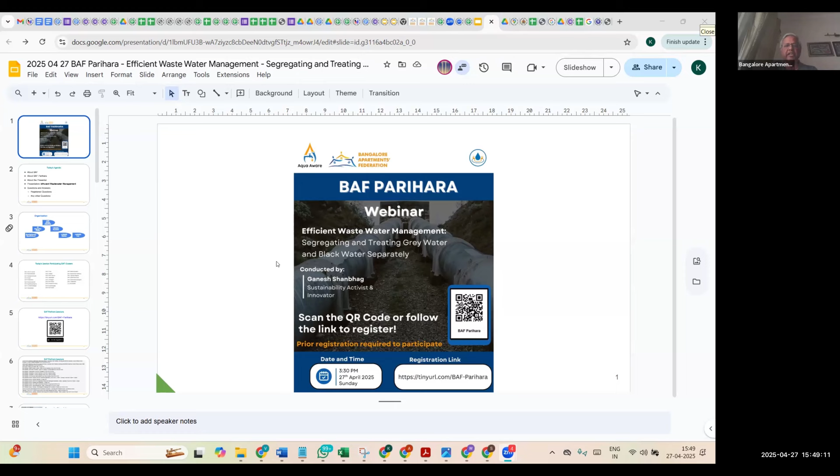Today's session is on wastewater management specifically, how we can do a better job and be more efficient in terms of treatment. And we have our expert speaker today, Ganesh Shanbhag.

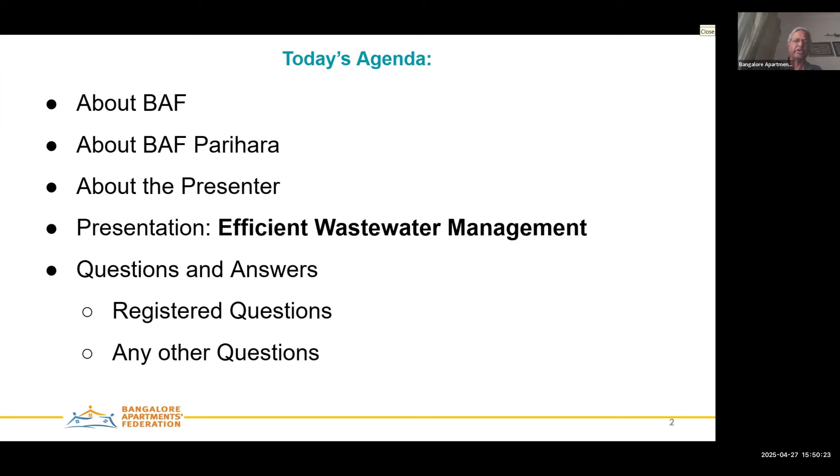We are structured with a governing council at the top hierarchy of the organization, then we have an executive council, and the entire cluster council representing the 30 geographical clusters.

Today's session is being attended by 20 representatives of 22 clusters.

We host a series of programs of interest to apartment communities, specifically managing committee members, and these are all hosted under a series called BAF Parihara. Parihara, as you may be aware, means solution. So today's session is one among them, and we've conducted numerous sessions on a variety of topics.

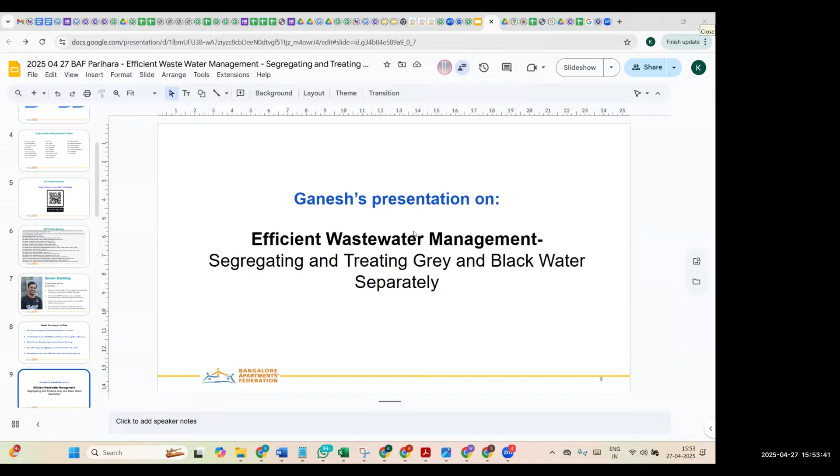So let me make you co-host. Am I audible to everyone? You're audible, yeah, loud. Okay, so I'm just sharing my screen. I'll have to make you co-host. I'm doing that. You are co-host now. Yeah, I am sharing.

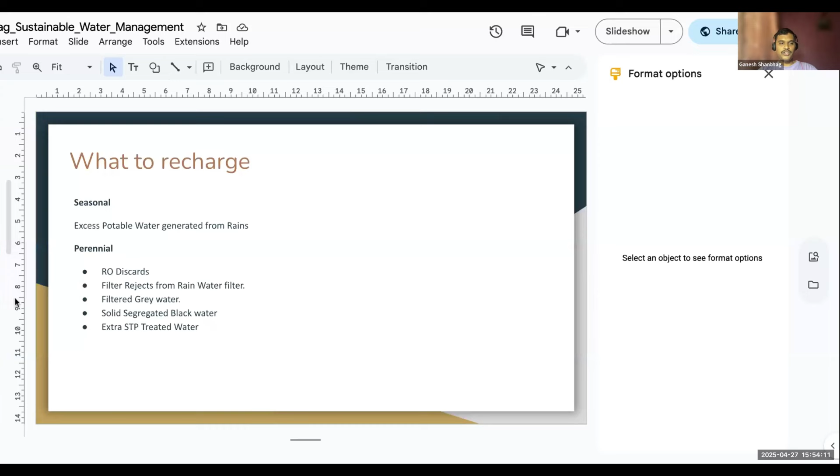So what I have done is I have made a consolidated slide now for both the sessions together, the rainwater harvesting part as well as the wastewater part, whatever I'm talking today. I will skip all the slides I have already covered and start directly into the wastewater part. We stopped here on recharge in the previous session, and now we'll start with the wastewater subject. Is my screen visible to everyone?

Yes, okay cool. So before we jump into the session, I just want to ask this question: is it wastewater, or is it wasted water? I'm pretty sure that those who have stayed in Bangalore for a very long time know that there was a river called Vrushabhavati, and it has a very beautiful meaning. Vrishab in Sanskrit means bull. The river which touches the feet of a big bull temple and flows is known as Vrushabhavati.

It was a very beautiful river, and right from the age of the Vijayanagara Empire, it is well documented how, under Kempegowda and others, trade flourished and agriculture flourished in the Vrushabhavati basin. Even today we celebrate Kadlekai Parishe, Avarekai Mela, and other such events. So Vrushabhavati was a very rich river, but today what have we made it? It is called Kengeri Nallah, right?

Kengeri Nallah is pitch black in color. It has no life in it. Absolutely no bird wants to drink that water. It is full of froth, and it's not a mistake of civilians alone.

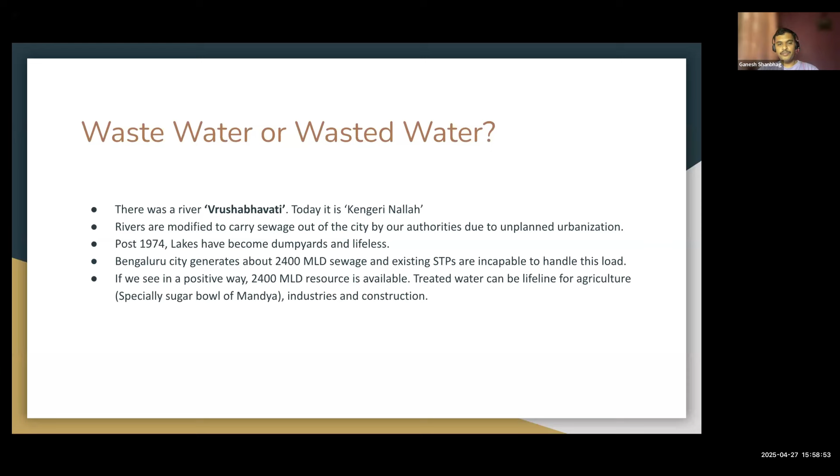All those green leafy vegetables mostly come from Chikkaballapur.

So let's talk about the problems with wastewater management. First, BWSSB's centralized sewage treatment plants are there only on paper. They are not working. If they were working, we never would have had nalas. So they are existing only on paper.

They say that they have like 68 or 70 STPs. They are planning to add another 60 STPs. Everything remains finally on paper. Nothing works. I don't know how to fix this, but at present it's not working.

And apartments are a different story altogether. People believe whatever STP installed by the builder is really great, but as soon as the builder hands it over to the RWA, it no longer works, because the builder would have done it in such a way that it's very cheap to install and very expensive to maintain.

SBR is the commonly used type of STP in Bangalore. SBR stands for sequential batch reactor. It's commonly used but very expensive to maintain. To give you an analogy, for a 1,000 flat apartment, it requires 2 lakh worth of power, about 70 to 80,000 worth of chlorine, two shifts of operators, and sludge removal every day. So it's very expensive to maintain.

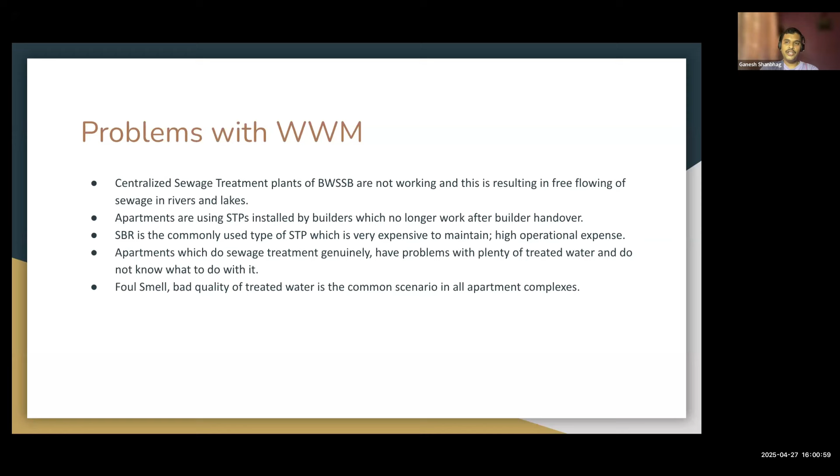There are a lot of apartments who actually do sewage treatment very genuinely, but the problem is they generate plenty of treated water and do not know what to do with it. So we'll address that concern as well today. This is the common scene across all the apartments: foul smell, bad quality of treated water, and a lot of other issues. Foul smell is at least the common issue across all the apartments where I have visited.

So I am working with something called a decentralized solution. What is a decentralized solution? It means you treat your sewage such that your kitchen waste, your grey water, and the water generating from flush are treated separately. By treating separately, you don't need sewage treatment, rather you need sewage filtering.

So whatever I am inspecting over here, on the skid, you can see there is a white color box which is a white color filter. This is called Aquatron, also known as a solid liquid separator, and it helps in treating black water independently. I have a video which follows, which will illustrate it better.

And this one in the center is a grey water filter, and grey water filters are readily available in the market. When grey water is passed into it, the soaps and detergents get separated, and clear water comes out of that filter. So now instead of treating the sewage, you are filtering the sewage, and everything is done without energy.

The SBR STP, the sequential batch reactor, is a power guzzler. As I told you, a 1,000 flat apartment would require about 2 lakh worth of power per month to run it. But this solution I am talking about is completely free from energy.

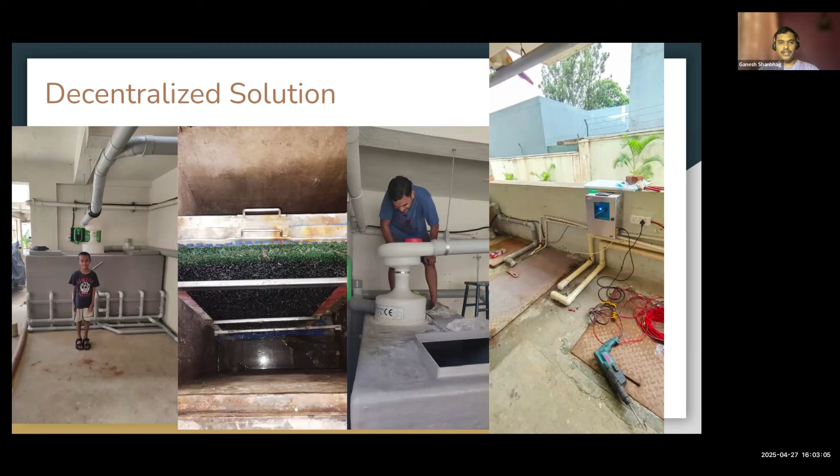And the last one we are seeing is disinfection which is done using ozone. I'll talk about it when we come to the video illustration in the next slide. Okay, so I'm just playing the video.

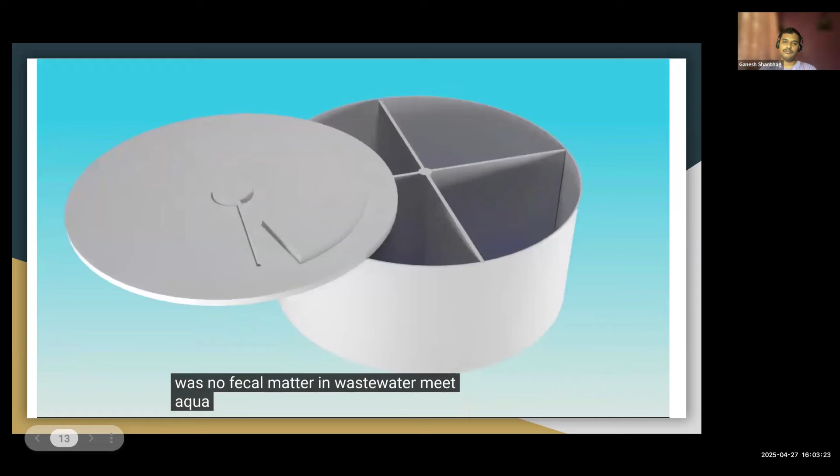Have you ever thought of how much easier wastewater treatment would be if there was no fecal matter in wastewater. Meet Aquatron, the solid liquid separator that removes feces from flushing water as soon as a toilet is flushed.

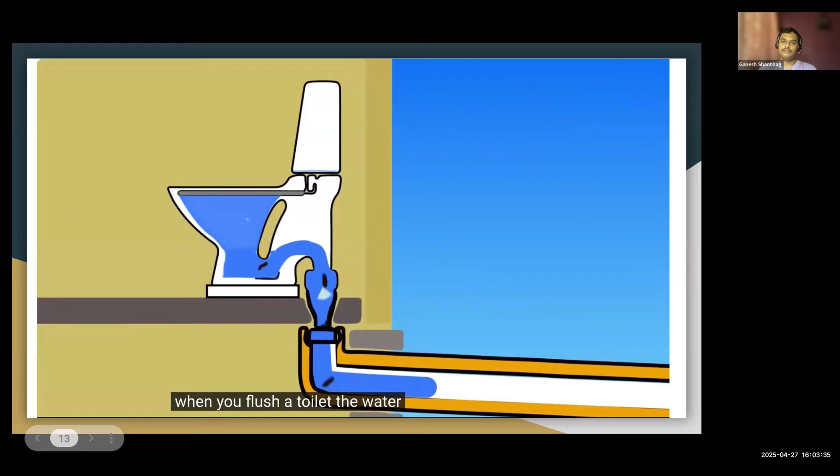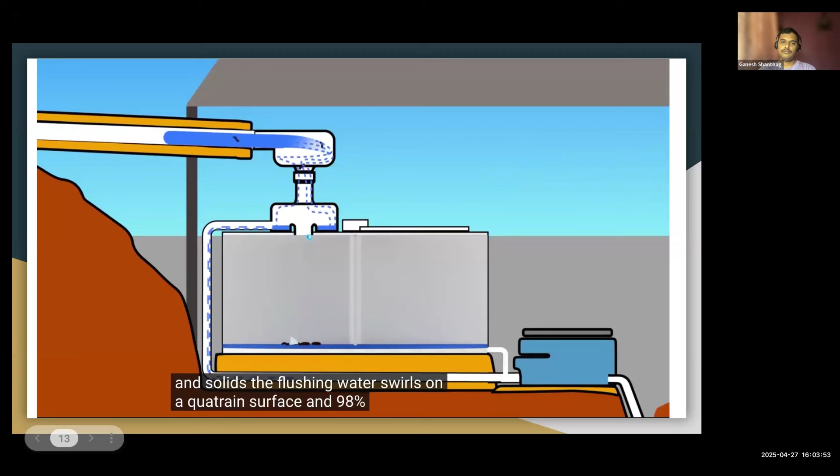When you flush a toilet, the water and solids travel towards Aquatron with good momentum, and once they enter Aquatron, centrifugal force and gravity step into action to separate the liquid and solids. The flushing water swirls on Aquatron's surface, and 98% of it is recovered without any solids. Fecal matter and paper fall straight down into the biochamber under Aquatron, together with 2% of the liquid.

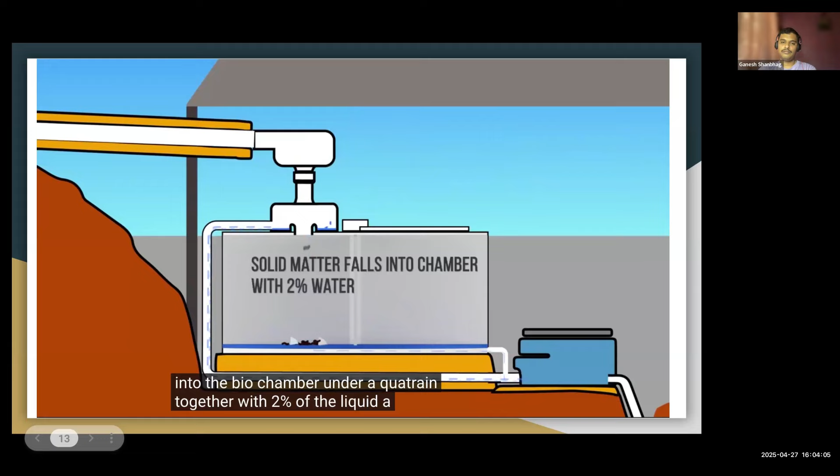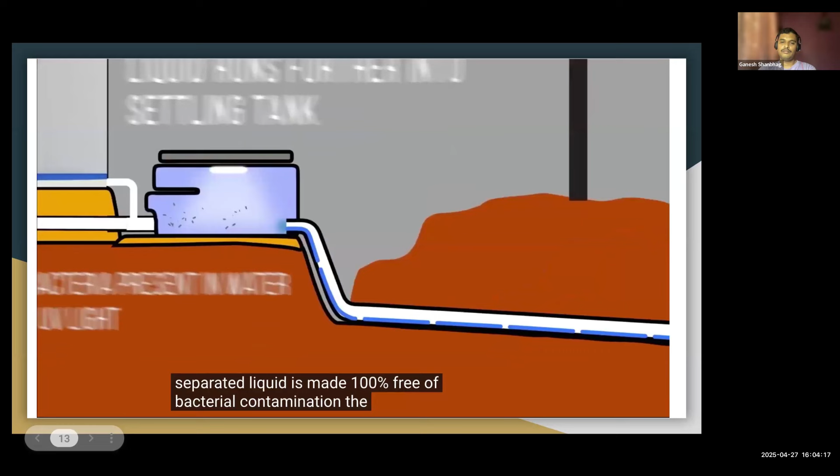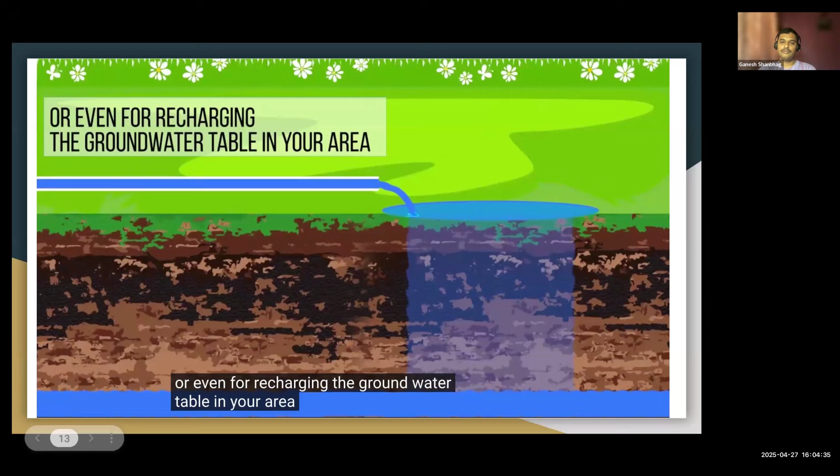A specially designed UV unit complements the system and makes sure that the separated liquid is made 100% free of bacterial contamination. The separated flushing water flows further into a settling tank, where its quality is improved by letting the suspended solids settle. The urine-enriched liquid is immediately ready for reuse in gardening or even for recharging the groundwater table in your area. In regard to the separated fecal matter, there is a multi-compartment biochamber for treating the solids in a most natural way.

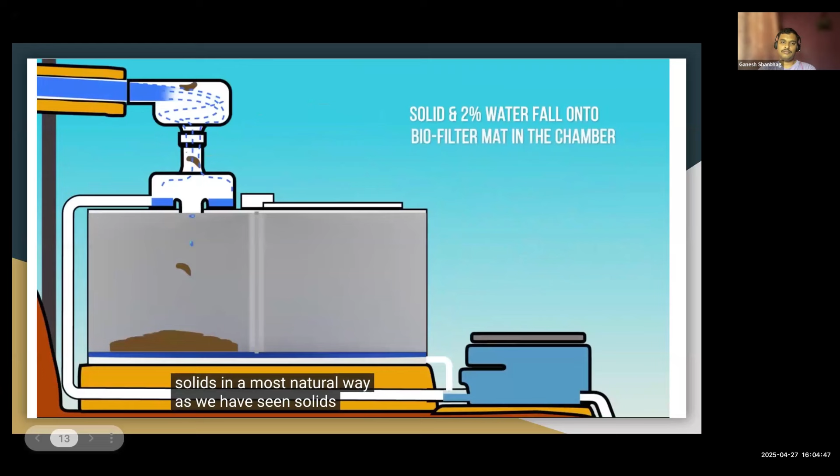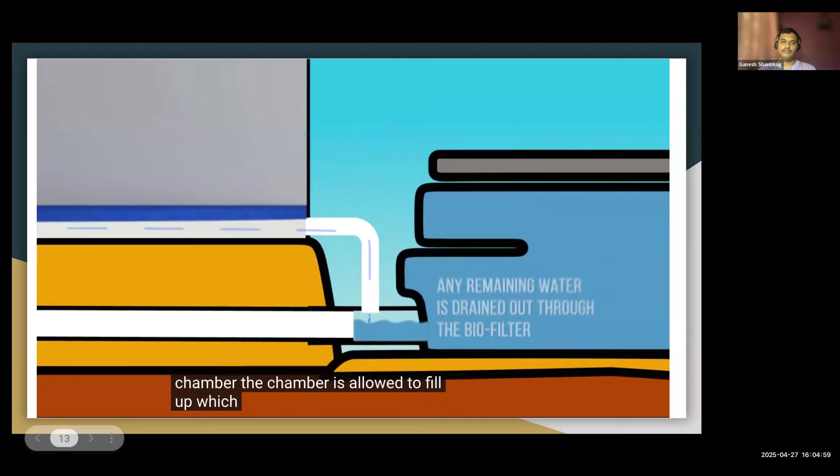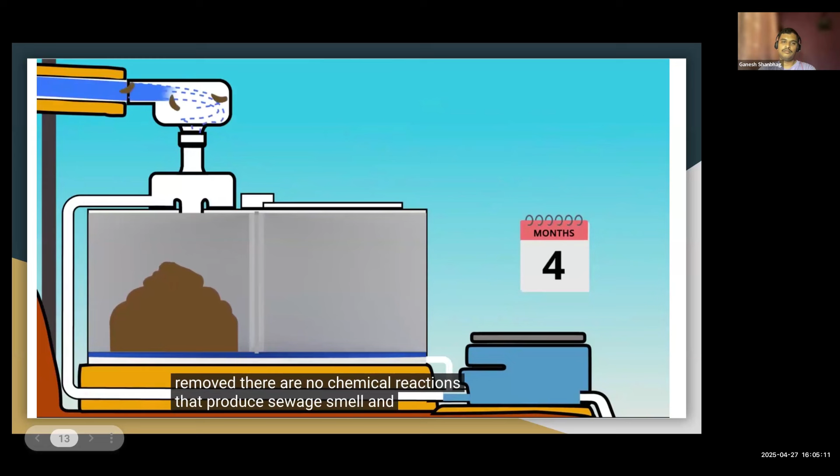As we have seen, solids fall onto the biofilter mat in the chamber, and the remaining 2% water is drained out through the mat on the bottom of the chamber. The chamber is allowed to fill up, which might take a few months depending on the chamber volume and frequency of use. Since liquids are removed, there are no chemical reactions that produce sewage smell, and the non-septic feces don't attract flies either.

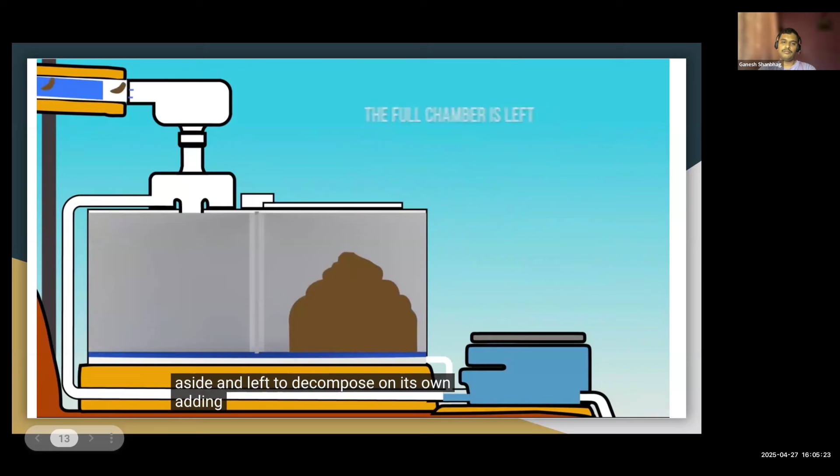Once a chamber is full, it is turned aside and left to decompose on its own. Adding some earthworms will make decomposition faster and more effective. Depending on weather and other conditions, decomposition might happen as fast as in a few weeks.

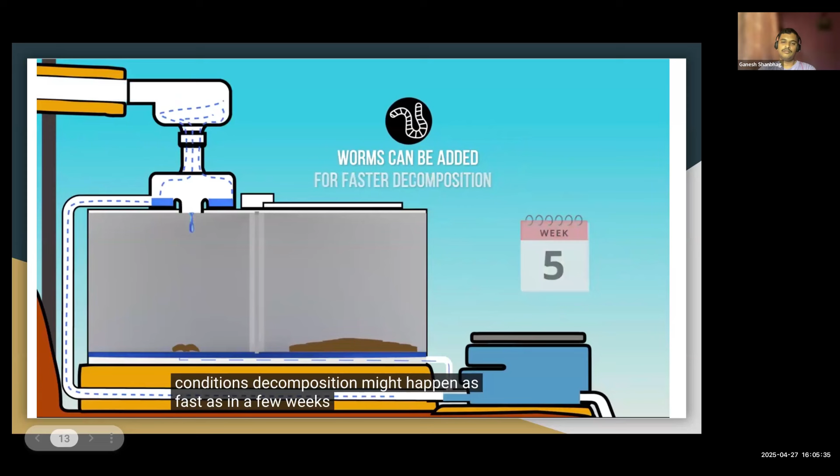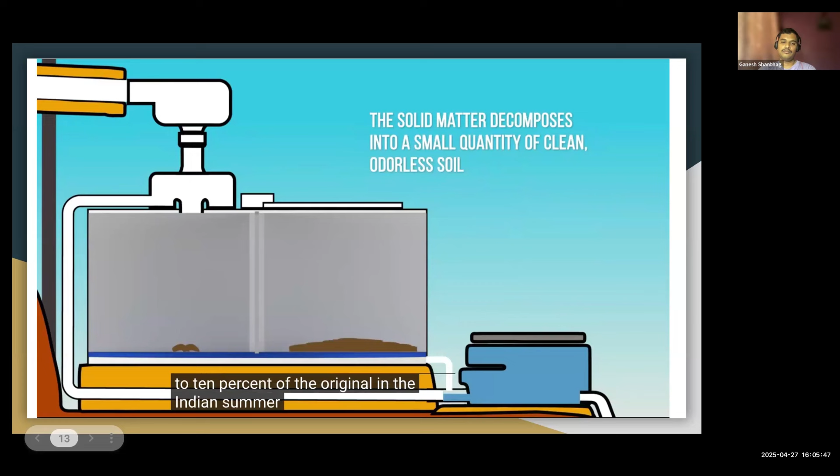Since the matter is turned into a gas, the final volume of composted fecal matter in the chamber will be about 5 to 10% of the original. In the Indian summertime, this process might happen as quickly as 2 weeks. The feces turn into a small quantity of hygienic, odorless soil which can be safely reused as manure.

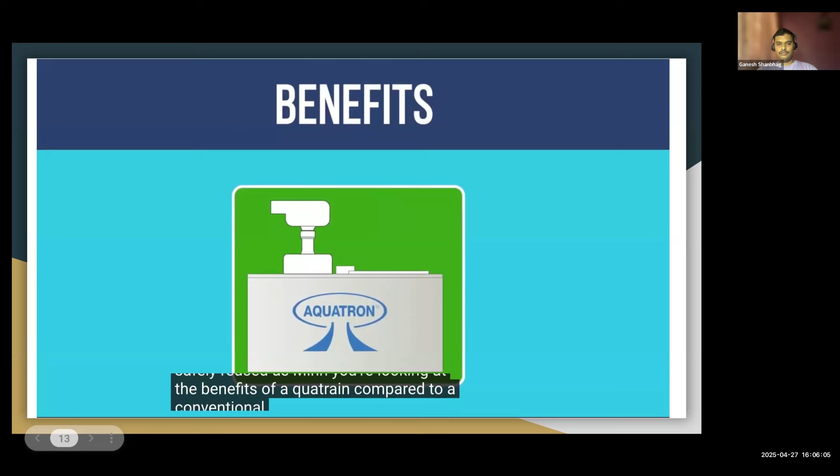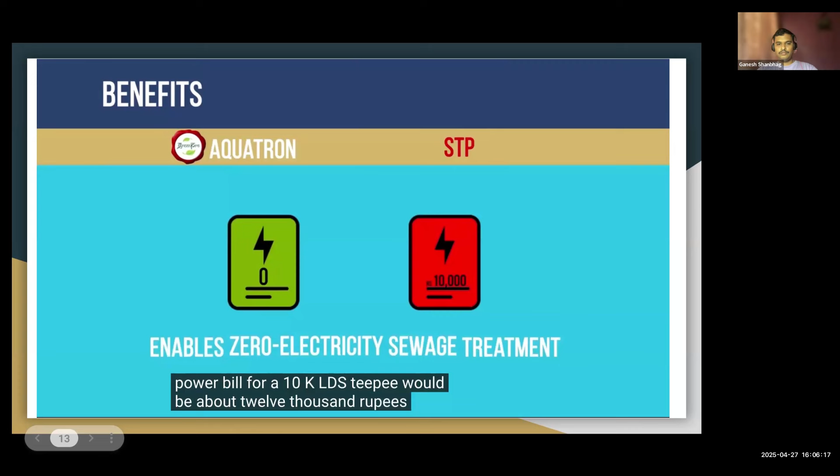Looking at the benefits of Aquatron compared to a conventional sewage treatment plant, the first thing is that there is no power consumption. For example, the monthly power bill for a 10 KLD STP would be about 10,000 rupees, but Aquatron runs without any power at all.

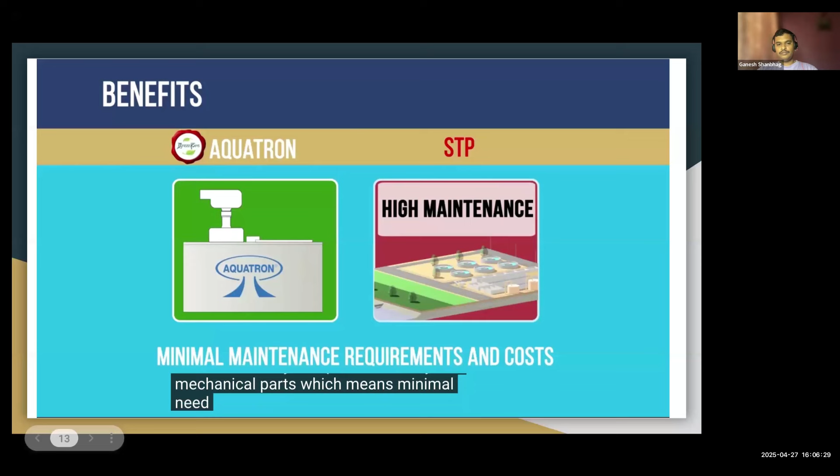The next thing is that Aquatron doesn't have any complex machinery and mechanical parts, which means minimal need for maintenance. There is also no need to purchase and use any consumables. Furthermore, there is no downtime for maintenance.

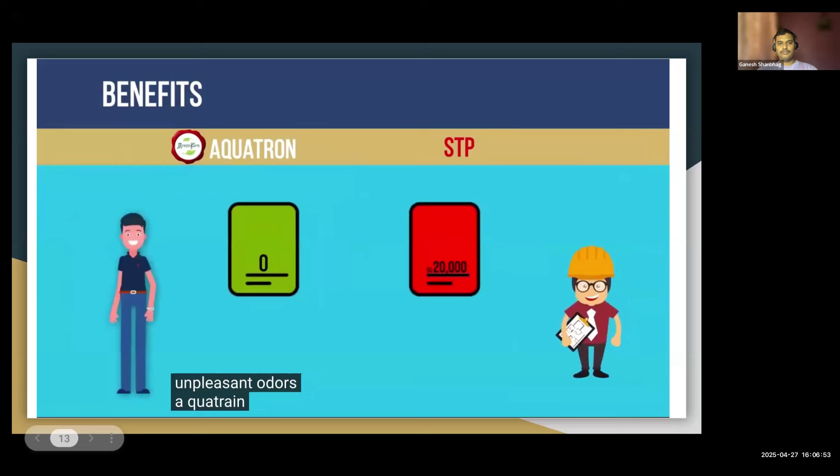As we already saw, an Aquatron biochamber doesn't smell, which allows placement of Aquatron in any location without the fear of unpleasant odors. Aquatron doesn't need a specially trained operator, and thus any operator charges are avoided.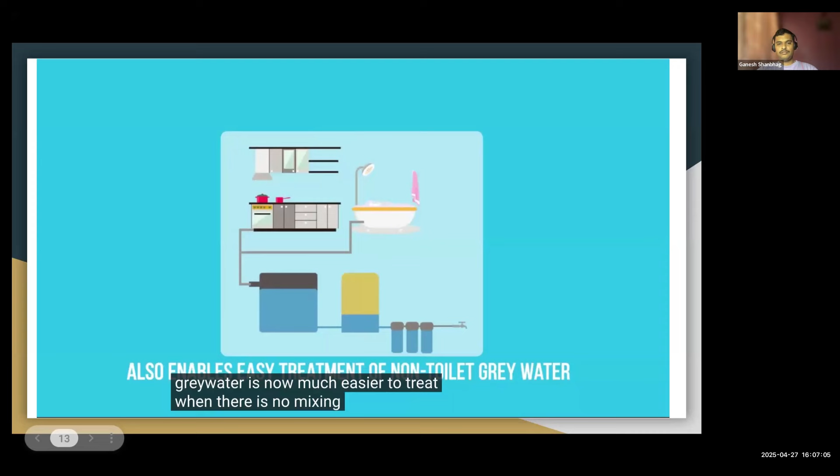Furthermore, grey water is now much easier to treat when there is no mixing with feces. Aquatron can be scaled up for any capacity. A single unit caters for up to 25 toilets, and you can keep adding units as per your requirement.

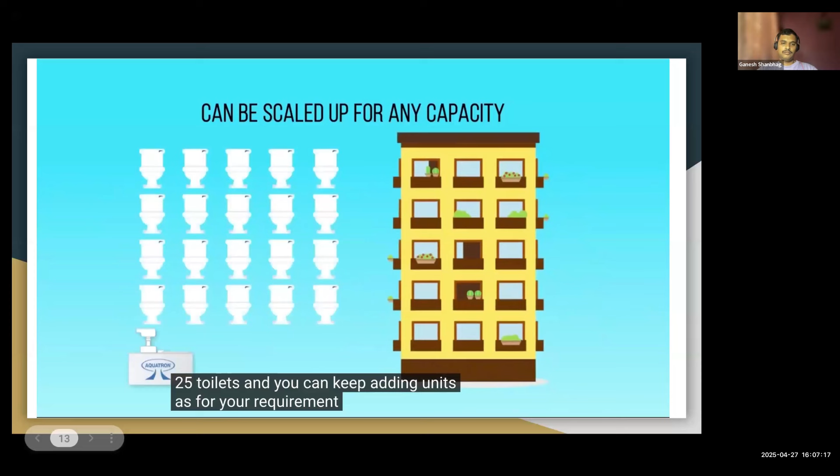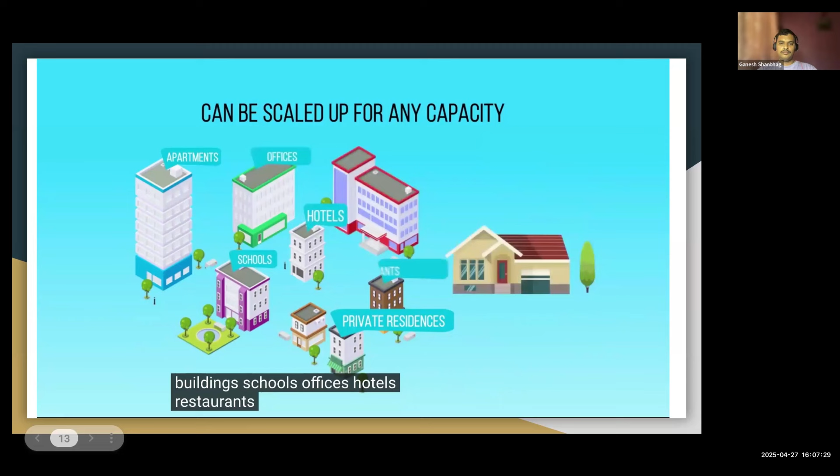Aquatron can be used in all types of buildings, from private residences to apartment buildings, schools, offices, hotels, restaurants, hospitals, cottages, farmhouses, and so on.

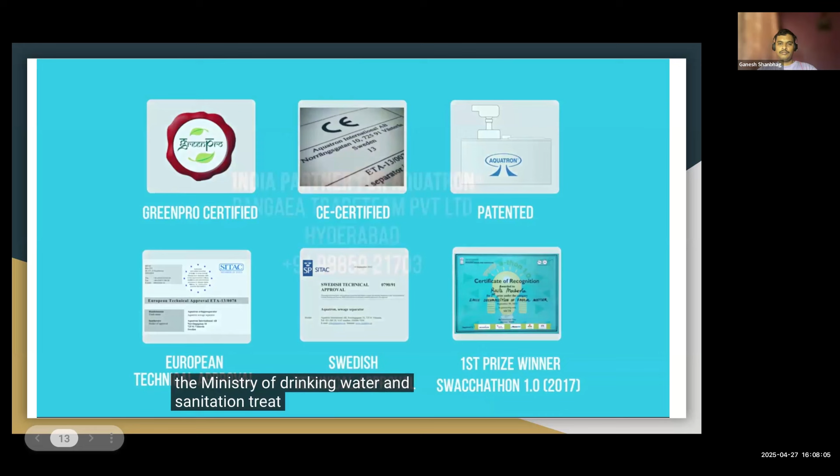Aquatron has the Indian Green Building Council's Green Pro certification. It conforms with health, safety, and environmental standards as per the European CE marking. It is patented and also has the European technical approval and Swedish technical approval, and it is the first prize winner in the category Early Decomposition of Fecal Matter in the Swacchathon 1.0 contest, organized by the Ministry of Drinking Water and Sanitation. Treat your wastewater in a hassle-free and natural way and get in touch with Aquatron India.

Yeah, moving on. Have you ever thought of how much... Yeah.

So moving on, now we understood how black water can be filtered using something like Aquatron. I'm not promoting any brand over here. There are other things as well available, but the video I thought was good, so I added that video over here so that everyone understands how easy it is to handle sewage.

And once the sewage is taken out of the equation, whatever remains is grey water. So Ganesh, okay, Ganesh.

Tell me sir, can you mention a few other brands also, so that we have multiple options? Yeah, I mean, I'm not able to recollect, but probably at the end of the session I can mention it. Is that okay? Please share so that we can share it further with people.

Thank you. Okay, so now we understood how easy it is to handle the sewage. The black water is treated separately, the grey water is filtered using the filter mats of Matala. I have the picture at a later point in time, and it's all simple. Now instead of treatment, it boils down to filtering.

And the beauty about this is it can even be further filtered to drinking water, which complies to IS 10500 grade, right? So this is the white water plant.

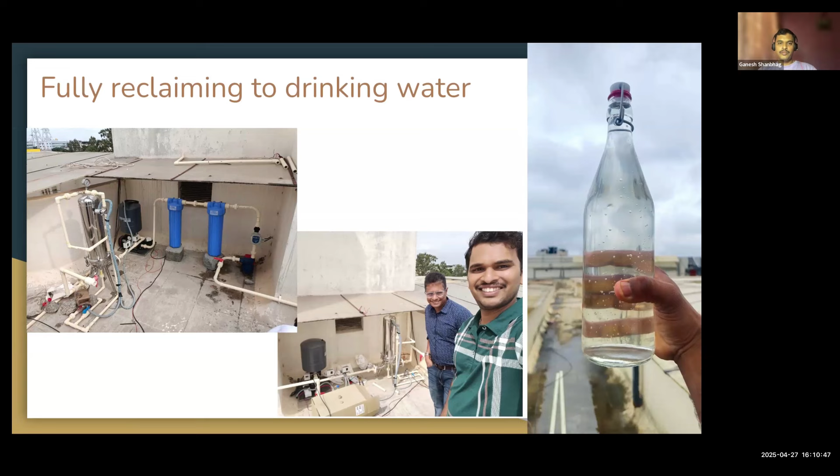Coming to the next part, this solution isn't just deployed at the apartments. I also deployed it at my parents' house in Hubballi, North Karnataka. This is a new construction done in 2019.

Like everyone constructing a home or apartment, the first thing they do is drill a borewell. My dad also told me the same thing: we are constructing a new house, I am going to drill a borewell. I told him, whoever is drilling the borewell, please take an agreement saying it will run for at least 10 years so your investment of 5 lakh rupees is justified. Nobody was ready to sign that agreement.

Then I told my dad, drilling a borewell is not the only solution. There are other solutions in the market which will perennially generate drinking grade water for a lifetime, not just 10 or 5 years like the life of a borewell. So my dad agreed to have the sewage filtering unit for the individual house we built in Hubballi. You can see this is the grey water filter.

There are two steps of grey water filtering with this grey box and the grey tube you are seeing, all done by Aquatron and Matala. This is the ozone for disinfection of the water - instead of UV, we are using ozone for disinfection. These two filter out the sewage.

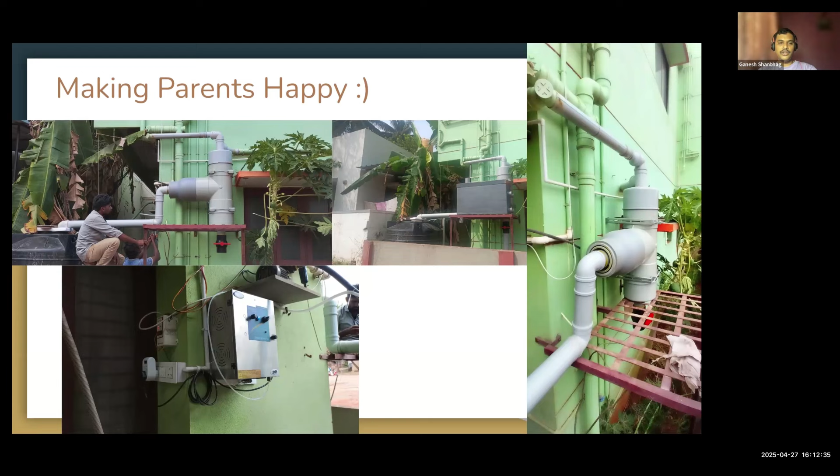I had shared this last time - there is a white paper which I have done. I'll be sharing this PPT at the end of the call so you can go through the white paper and get more insights on it.

I think that's it. On the media, you can search about me - I have regular print media articles and regular podcasts. Recently I did one podcast with Nolan Pinto as well, who does the podcast called Let's Talk Water. I'll probably add the link so you can take a look at it.

I'm there on FM as well and keep doing social media postings. I do something like this - I learn from celebrities a lot. For me, celebrities are the ones who are actually on the ground solving sustainability issues.

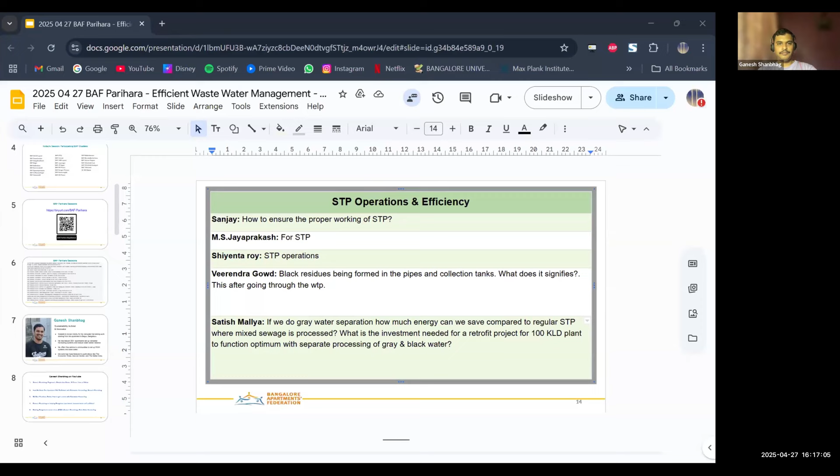Let me read the first question. Sanjay ji asks how to ensure the proper working of STP. Sanjay ji, if you're there on the call, can you please tell me the type of STP you're referring to?

I don't think he's there on the call, but just to ensure the proper working of the STP, the output quality is very important, and the output water should be regularly tested with NABL accredited laboratories, the National Accreditation Board for Testing and Calibration Laboratories. There are plenty of them in Bangalore. You can get the test report done, and it will suggest what kind of water you are getting from the STP, and based on that, any tweaks can be done.

I don't know whether the next is a question or something. I'll go to Veerendra Gowd. Black residues being formed in the pipes and collection tanks - what does it signify? This is after going through WTP.

Sir, are you talking? I see you are there on the call. Are you talking about WTP or STP over here? Can you speak up, sir? Myself Jayaprakash. Okay, yeah, go ahead, sir. Actually, I have asked for the STP details.

See, we have 70 KLD STP operation. Our apartment comes in Mahavir Sada, 154 flats we have. What is the question? Aqua, how is it working, sir? We want installation, what will we do for that? Sorry, I did not understand, can you repeat it? Sir, actually, we have STP 70 KLD project.

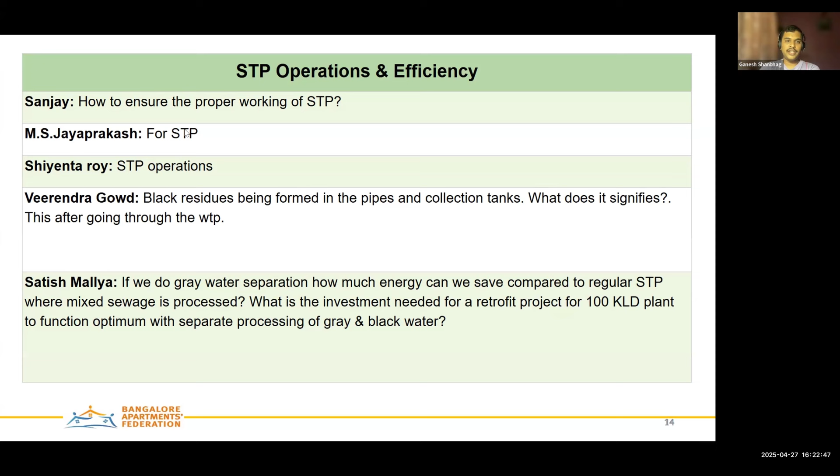Any sustainability projects will give you ROI within 3 to 4 years. But the plant, whatever we are installing, what is the life of that plant? The life of the plant is more than 25 years.

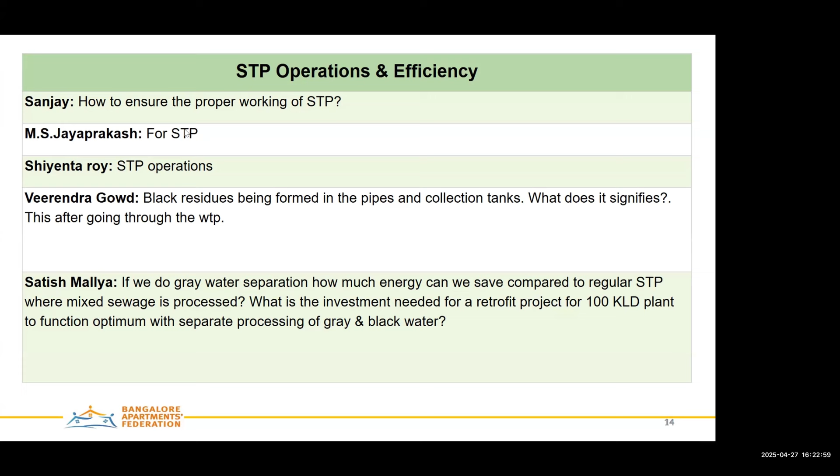Okay, that's useful. JB Mohanty asks how to reuse the recycled water for domestic purposes. Sir, I just showed the example of how to create drinking water out of it. You can even drink it. You can see my recent podcast with Nolan, where in the podcast itself he has drunk the sewage-to-drinking water, reclaimed water. So that's how efficient it is.

Sridhar asks how to efficiently use excess treated water even after gardening and flushing toilets. Sir, you should convert it into white water and give it back into your domestic supply. That's the best thing to do, and there are a lot of companies in Bangalore already doing it, Boson is one example. You can connect with me and I can connect you to a few vendors who can help you with that.

Ramakrishnan sir asks what type of water is used for car wash, gardening, mopping, vessel washing, bathing, and cooking, and how this can be met with borewell and rainwater harvesting water with minimum intake from tankers and BWSSB. Sir, I think my entire PPT gives an answer to your question, which was sent in advance. So I think it is very clear now.

Okay, but I put another question in the chat box, which you can take up later. Okay, sir. Yes, sir.

Dr. Dharmaraj asks how to manage wastewater, STP treated sullage, kitchen and bathroom water after using it for groundwater harvesting and gardening, when it can't be let out to sewage, UGD, stormwater, and drainage. I think I gave the solution about white water, sir. You should convert the excess water into drinking grade water and use it back for all your potable requirements.

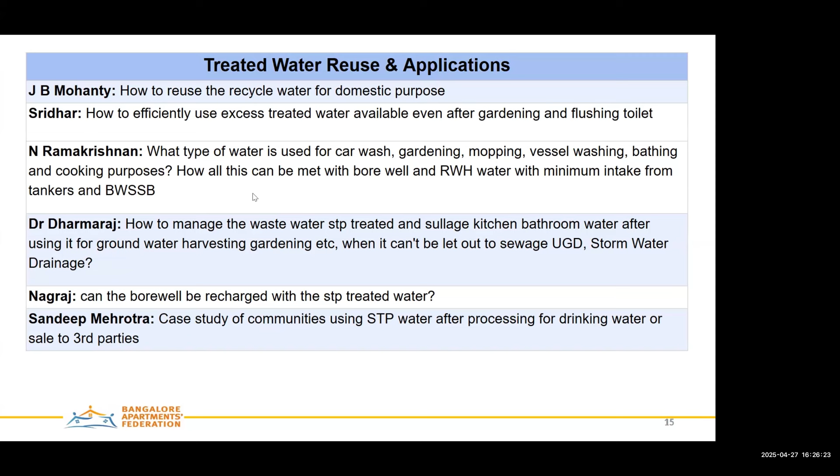Sir, I think you should connect with Vikas Brahmavar of Boson. Recently I was there at their summit. Another example is Z Homes, built by Dr. Hariharan Chandrasekharan of BCIL, long back, maybe 10 plus years. They are already doing it, and there are a lot of apartments doing it. I can connect them with you. That should not be a problem.

Okay, because we have contacted Boson Whitewater and we've had discussions with them, but we were unable to get any case studies of communities using it for drinking water. But we'll connect with you offline, not to take your time now. No problem, sir. Thank you.

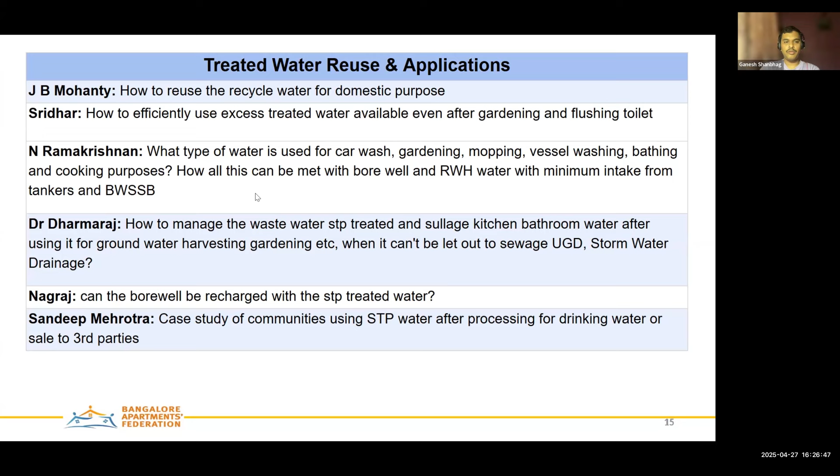Okay yes sir, grey water is... we will need solutions to use grey water from neighboring apartments that have STP, and we don't. You want to use grey water from the neighboring apartment? Pradeep sir, are you there? Yes, yes, yes, I saw that. Can you elaborate this a little more?

What you have shared now is a completely different thought process. Our intention earlier was, we don't have an STP, but there are other apartments nearby who have STP, and we are struggling because even for gardening we could use their treated water, but we were struggling to get it since we don't get tankers and things like that. So I was thinking if there is some solution, but what you've shared now opens up a completely different way. Probably we will look at installing the Aquatron type of solution and use less tanker and BWSSB water. Thank you very much.

Yeah, you should have your own grey water, right? So that, just like rainwater filters, grey water filters can be installed. I think I showed it at my parents' house, right? The way it is done is very compact, and that can be fixed, and you can use it for your flush, garden, and all these requirements. Perfect, thank you so much.

Ganesh, you mentioned your parents' home. So for an apartment with 100 homes, what is the kind of square footage required to set this up, the Aquatron or an equivalent solution? Since I have done it in multiple places in Bangalore, whatever space an SBR takes, it is only 40% of that. That's it, the remaining space comes back.

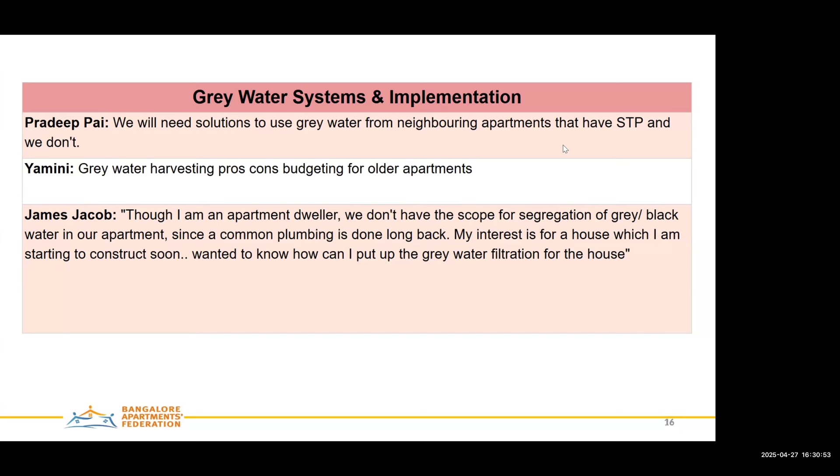Okay, I think maybe if Yamini comes back, please ask her to drop me an email. Can get more details about it.

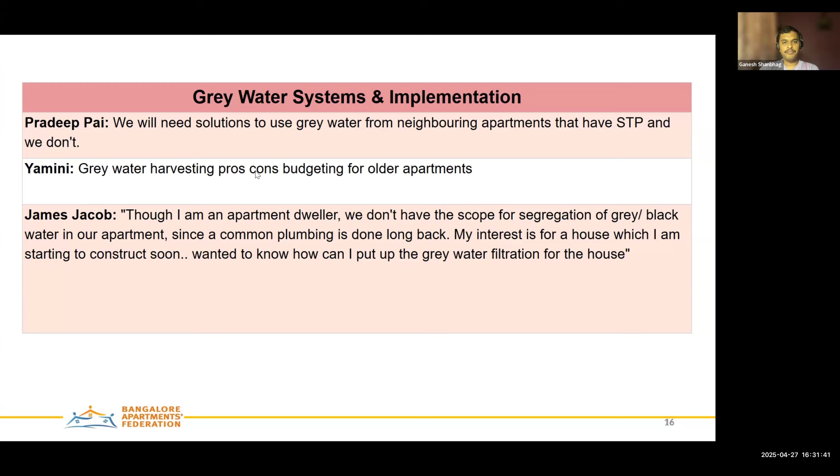James Jacob says, I am an apartment dweller. We don't have scope for segregation of grey and black water in our apartment since it's common plumbing done long back. My interest is for a house which I am starting to construct soon. Wanted to know how can I put up. I've already shown a picture of my parents' house at Hubballi, North Karnataka, and I will be more than happy to give you the solution for this. I'm already doing it here in Bangalore for an individual house very close to me, so I'll be more than happy to take you to that place as well. Please do connect to me.

There is a question on the chat which is almost similar, but I'll answer this in more detail. I think James Jacob will get a clearer idea about it when I speak about that. Ramesh sir, since you are here, do you want to elaborate this question?

No, it's okay, I just got it. Don't worry. I think you have already seen our plants working, right? Yeah, I know. I was more interested in the design aspect of that. Yeah, I can keep it, I can share the designs with you. Should not be a problem. I have a CAD drawing and all those things. That would be great, actually.

Kanishka Sarkar, do you have empaneled consultation services available? Yes, I can connect you with the people who are into this. There are a lot of vendors who only talk about green STPs today. One is Eco STP, which is Bangalore based, and there is Plateau Green, who work with me for Aquatron and Matala and all these kind of things. So there are a lot of people there, I can connect them with you. That should not be a problem.

Can we go with the next slide?

Does anyone have efficient water management saving cost analysis and metrics for measurements? This is more of academics. I think I don't have it, but can try to build this. I don't know whether BAF has it. Arun sir, do you know? No, we want to build it. We've started on it, but we don't have a ready blueprint for this.

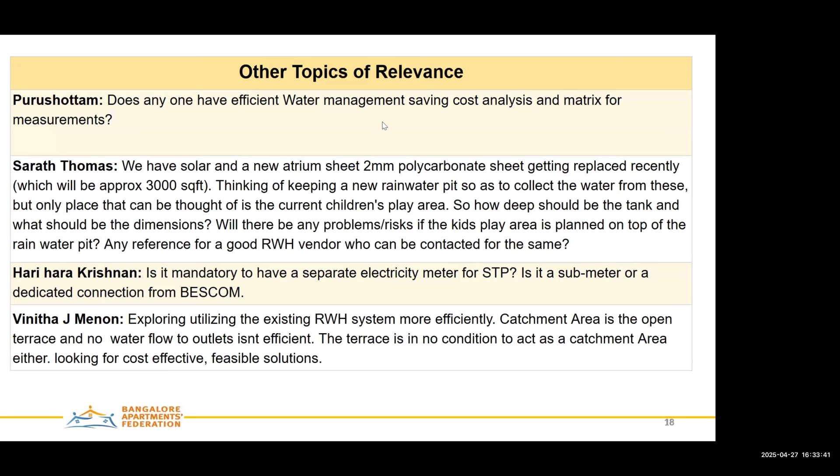Thinking of keeping a new rainwater pit to collect the water from this, but the only place that can be thought of is a children's play area. So how deep should the tank be and what should be the dimensions? Will there be any risk if the kids' play area is planned on top of the rainwater pit? Any good reference for a RWH vendor who can be contacted for the same?

So the answer to this, this is about rainwater. Like I think I explained last time, for a rainwater pit you need to get the soil percolation test done. That will give you the depth required, and based on that, for your 3000 square feet area, how much depth is required can be ascertained. There will be multiple rainwater pits if you want to do it, but I've given a better solution in the previous talk, where you convert the rainwater completely into potable water rather than recharging it. So I think you should consider that first before thinking about recharging.

But yeah, as for problems or risks if the kids' play area is planned on top of the rainwater pit, I don't see any challenges because it's all civil construction, and there are a lot of apartments who have done this already, so there should not be any problem. And for any reference for a good RWH vendor, I'm sure BAF will have a directory about it.

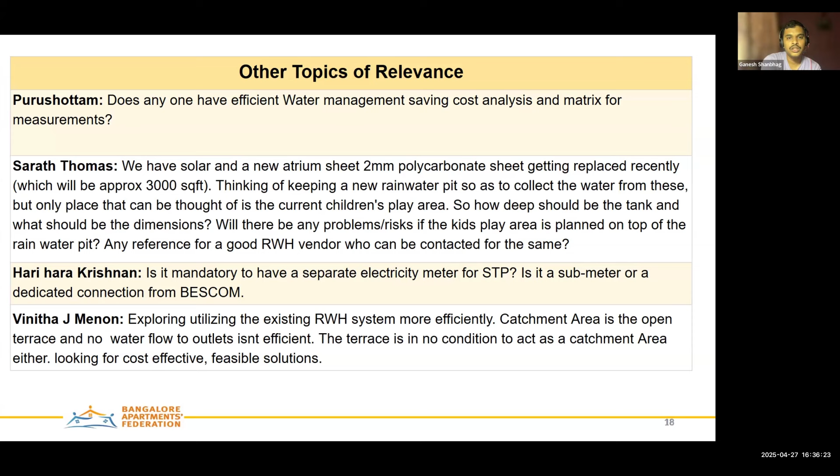SWM subject is very hot, so we thought, though Devanathan has put it in this wastewater management session, BAF is doing a lot of groundwork with solid waste management company BSWML, trying to get clarity, and we've been communicating one related to the additional property tax also. So please look at the communication that has been issued across the BAF network, you will get clarity on this.

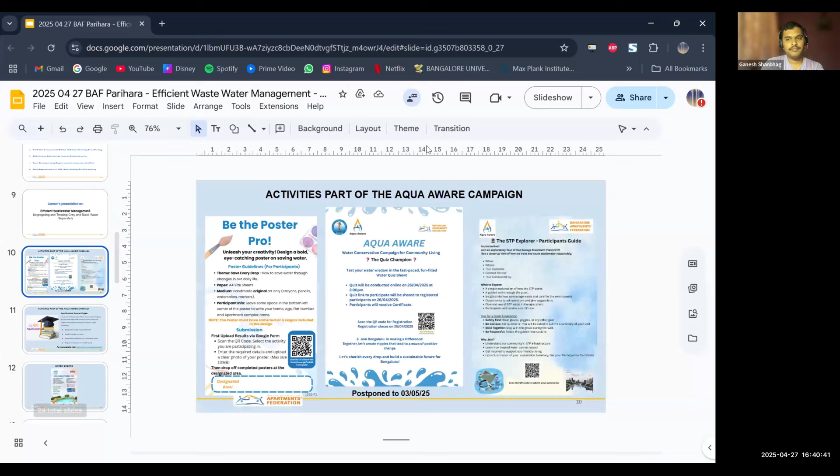Yeah. Okay. Yeah, you want to talk about this, Joanna?

Sure, sir. So as we mentioned in the previous webinar, as BAF we've launched a campaign called Aqua Aware, which is about water conservation in lieu of World Water Day that happened in March. We're organizing a few activities that can be done simultaneously throughout the month. The first one we launched was Be a Poster Pro, an art and poster designing competition. All of these competitions, barring the quiz, can be done at any time throughout the month, and you can submit your entries through the QR code form presented on each poster.

The second activity we launched was the STP Explorer, where each apartment individually sets up a tour of your STP in your apartment complex, and you essentially get hands-on learning of how your STP works and how your water and wastewater is treated. By the end of the activity, you write a summary of your learning from that session and submit it to the form.

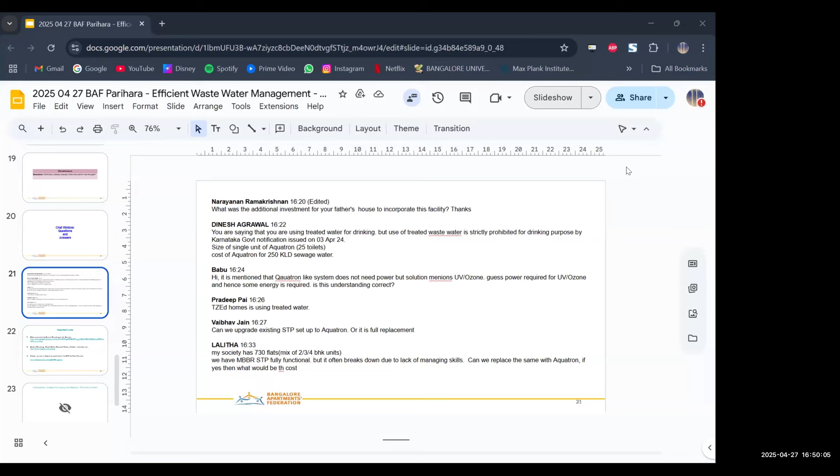Okay, I mean, if people have these kind of things, what can be done, right? So give me 1 minute, I lost the chat window, so I'm sharing the screen. So the questions are on. Okay fine, thanks Jonna.

Hi, it is mentioned that a Aquatron-like system doesn't need power but solution mentions UV/Ozone. Yeah, you are right sir, so UV and ozone are for disinfection, it's only for the last step of bacterial disinfection. It's like maybe 1% of the entire power required for the SBR, right? So that is what is consumed by the UV and ozone. Yeah, your understanding is correct.

The next was, I believe, a comment from Pradeep sir about TZed Homes by BCIL. So next one, Vaibhav Jain asks, can we upgrade an existing STP setup to Aquatron, or is it a full replacement? Yeah, it can be upgraded.

My society has 730 flats, a mix of 2, 3, 4 BHK units. We have MBBR STP fully functional, but it often breaks down due to lack of managing skills. Can we replace it? Yes, it can be replaced, but I don't know the kind of plumbing involved, whether it's separate or not. So maybe we should do a detailed analysis with empaneled vendors.

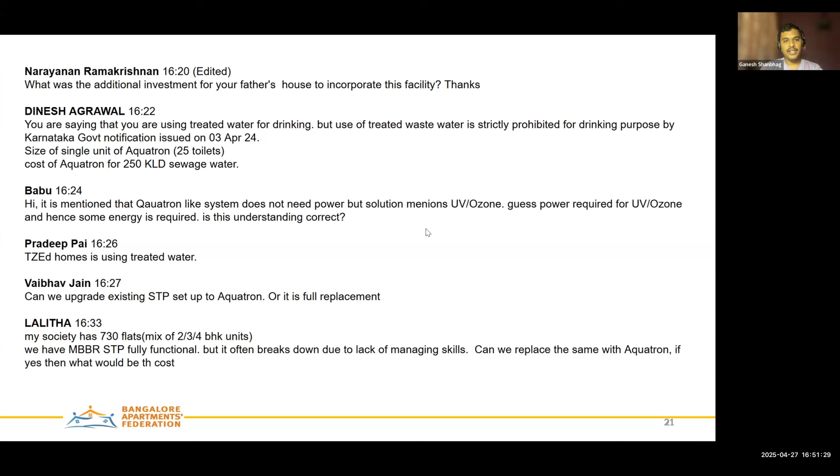I can connect you with the right set of people who can do this audit for you. We can connect on this. Is there a next question? No sir, I think that's it. Any other questions on the chat? No. Okay, over to you Satish sir or Arun sir. Thanks for providing the opportunity to talk about this.

Arun sir, you there? Sir? If you're speaking, you're on mute, sir.

Ganesh, my name is James. May I? I am staying in an apartment, but here this is the old type of plumbing where everything is put together, so I don't think anything can be done in an apartment. But go ahead James. Okay, I am constructing a house now, so I was interested to know.

It's just in the foundation stage, so I am interested to know, as you said about your parents' house, what are the options available for doing this, at least the treatment of the grey water. It's very easy sir, you just need to have grey water plumbing.